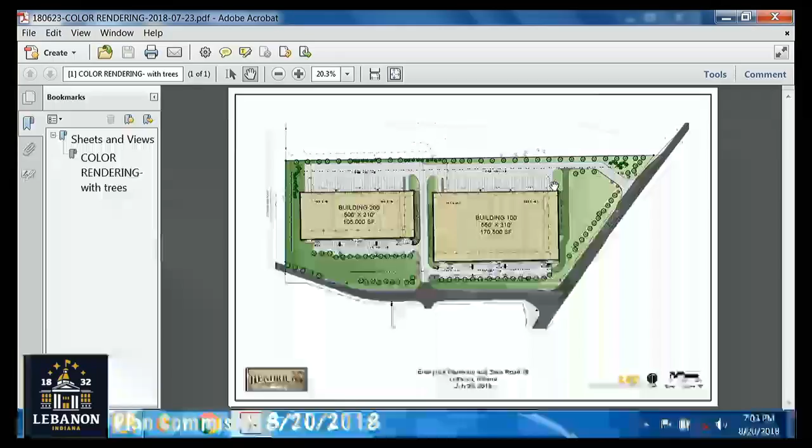Let me zoom in a little bit here so you can actually see it. They have two driveways, one that accesses off of State Road 39 and the other off Enterprise. One would be 40 feet and the other 34, just to allow them additional flexibility for truck access. The second one was corridor buffer.

They're modifying the corridor buffer along State Road 39 slightly. They do have plantings as shown, but there is some flexibility there for the corridor buffer. Again, non-residential street buffer on Enterprise Drive. Just some flexibility where this parking on building 100 here—they do have significant plantings, but just some flexibility on the buffer width.

Parking curbing impacts this center drive between the two buildings. What they're showing on either side here is the ability to add parking if necessary, depending on the type of user that ends up occupying one of these buildings. So they have requested flexibility to not have to put in curbing in this area, which could be expanded as parking as the site develops, until they know whether they need the parking or not.

And the final request, which still has some outstanding items we're working on with them, is a variance to request relief from the sidewalk requirement. They were approved to eliminate the sidewalk on Enterprise Drive. There's some physical limitations there, as well as the fact there's no sidewalks to connect to. The Board of Zoning Appeals did want them to investigate whether there was some ability to put a sidewalk on State Road 39 to increase connectivity back to the main part of the community on the other side of the interstate.

So we're going to work to connect with INDOT to see whether that's even feasible within their right-of-way. We're still working on that, so that's one outstanding item.

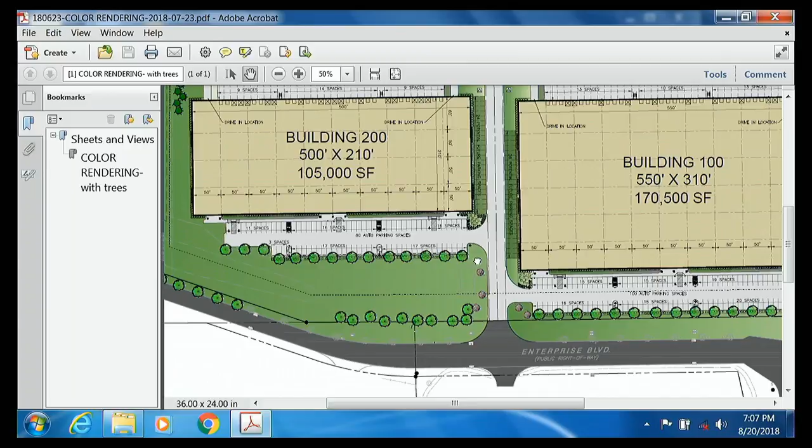This one doesn't show it, but they've added on another plan that they will provide additional landscape screening along this east end of the building to screen the truck access area from State Road 39 as well. That would be evergreen plantings.

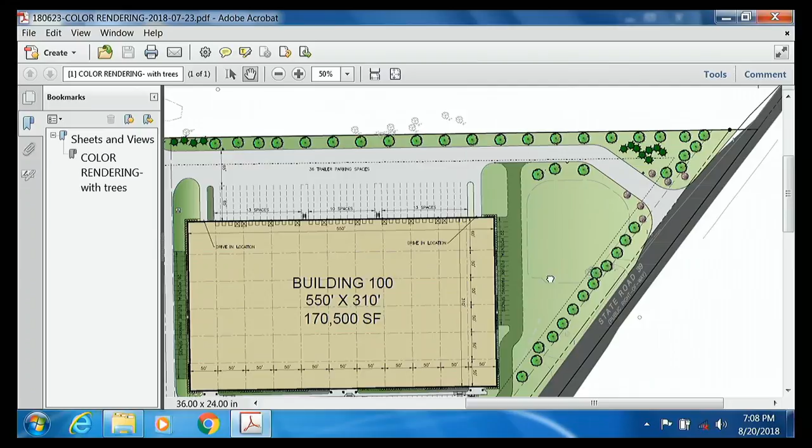This future drive will actually be installed at the current time for fire department access, and it will be paved at the current time, whereas here it's shown as future. But we did work with the fire department—they wanted to maintain 360-degree access around that building. So they will be installing that quote-unquote future drive now to make sure the fire department has access, and that will be paved.

In terms of signage, again this is speculative, so we don't know who the tenants are, but we identified what the requirements are in terms of wall signage and ground signage for this property. They'll be adhering to those requirements at such time that they apply for sign permits once tenants are identified.

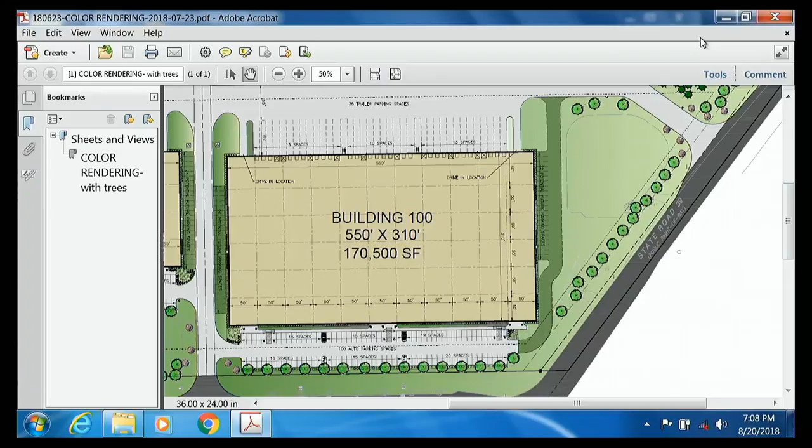Architectural review—I will pull up one of the building elevations for you so you can see what we're looking at here.

This top render represents what the front of the building will look like. It'll have 4 prominent entrances for the potential tenant spaces. This does allow for this to be a single tenant building or demised into potentially 4 tenant spaces. So they've got very prominent entrances, and all the materials meet our requirements from the UDO. It does represent an attractive design.

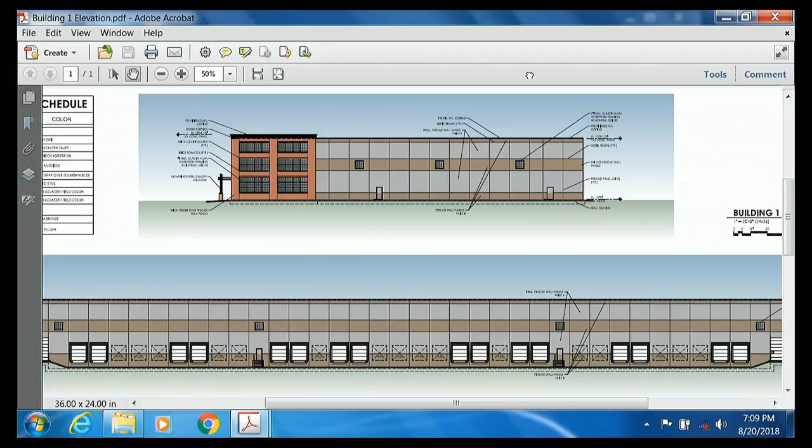I actually drove past one of these buildings in Wisconsin on the way on vacation, so I've seen firsthand what this building looks like on the ground. It is an attractive building. Those are kind of the highlights.

On the west side of the smaller building, they've provided access for fire trucks on the east side of the larger building. The fire department doesn't have any issue? My understanding is they did not have an issue with there not being 360-degree access. They would be able to access from the paved areas, both north and south, to any part of the building they needed to fight a fire.

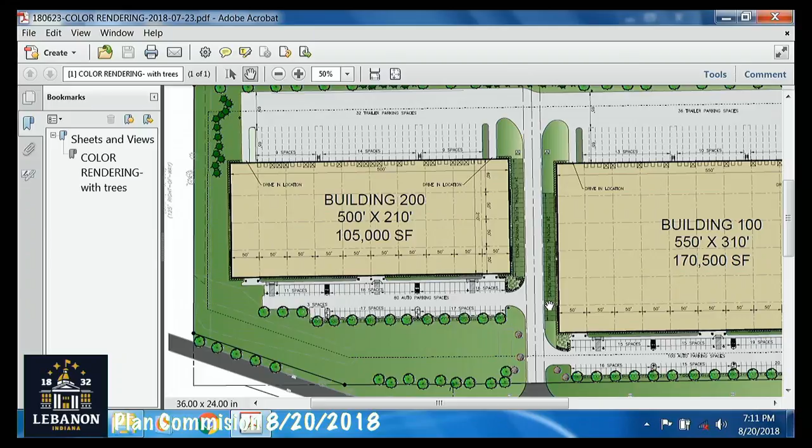And the driveway on that additional drive they're putting in on the east side, is that curbed or not? It would be curbed, yes. Let me clarify that a little bit—the one place it may not be curbed is where there may be potential future parking on either side of the drive aisle, where they'd have flexibility to install those parking spaces. Otherwise, it would be curbed.

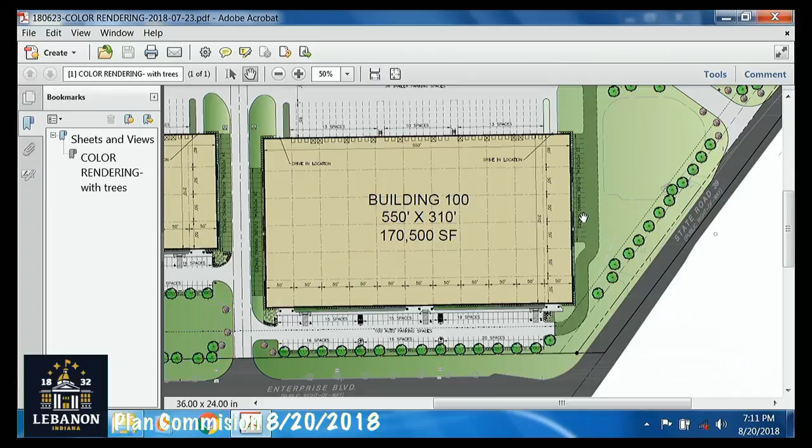Other questions for Ben? What about the rooftop units? With this being a speculative building, they don't have a location identified for units yet because it's going to depend on the user. We've made it very clear that those need to be screened per our ordinance, whether they're rooftop or ground mounted. But right now, they don't have a location.

Other questions for Ben? Would the applicant like to come forward?

I'm Aaron Hurt with Civil and Environmental Consultants, 530 East Ohio Street in Indianapolis. I was before some of you at the BZA hearing a few weeks ago. We have been working with staff, resubmitted our drawings and construction documents for the TAC comments, and I feel like we've made good progress, with just a few small remaining items to address. So we're working through those, and I think Ben did a good job summarizing things. Happy to answer any questions.

Questions for the applicant? All right, thank you.

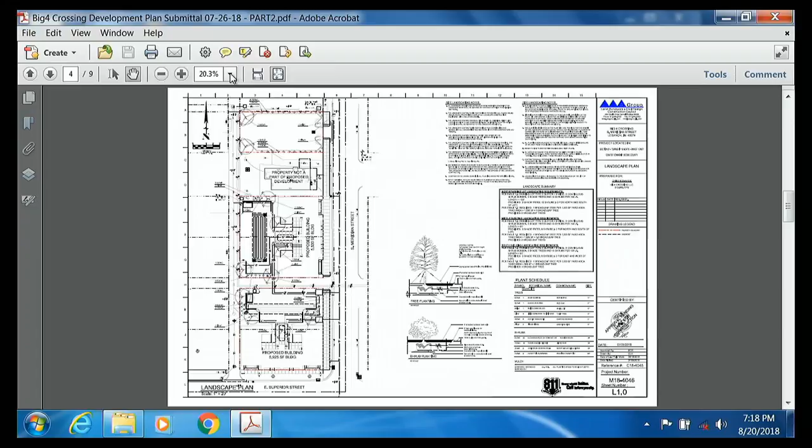So there are multiple components of this. The primary plat, again, those on the BZA have seen this already. The 2 buildings will be on the 4 southern lots. You've got 1 building that's right at the corner of Superior and Meridian. It faces Superior, which you see represented here.

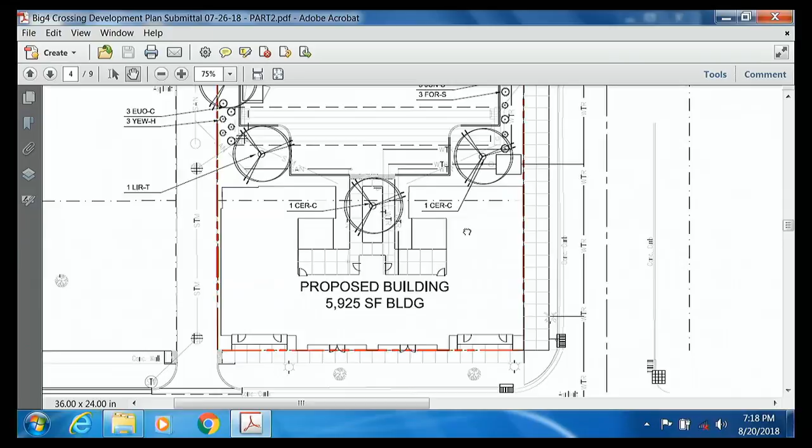So it has a retail storefront on Superior. Entrance to the residential units is from the rear of the building. You don't see them marked here, but there is parking provided behind the building, as well as the dumpster location. As you're moving north, there is the second building facing Meridian Street, very similar in footprint to the first, with retail spaces facing Meridian Street, access to the residential units from the rear towards the alley, and then parking and dumpster provided there.

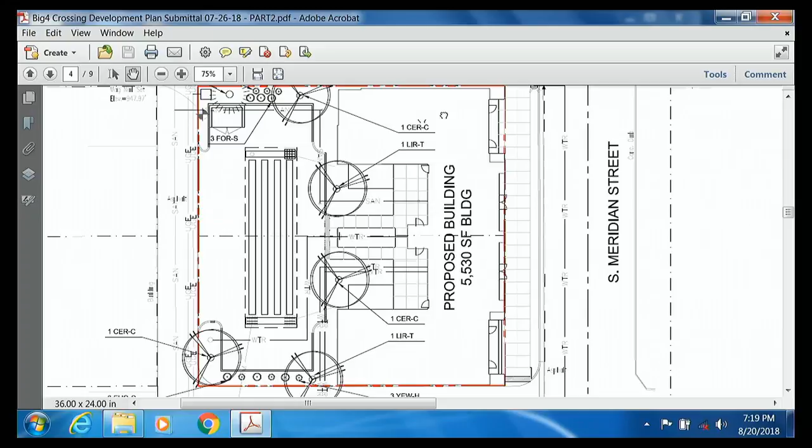In order to meet the parking requirements, which were very important here, they did also propose a parking lot on the far north. This is adjacent to the south property line with CVS, so they're taking up that remaining parcel that's part of this project to provide the required parking. I'll explain how the parking was calculated in a second, but just wanted to give you an overall sense of how this project lays out.

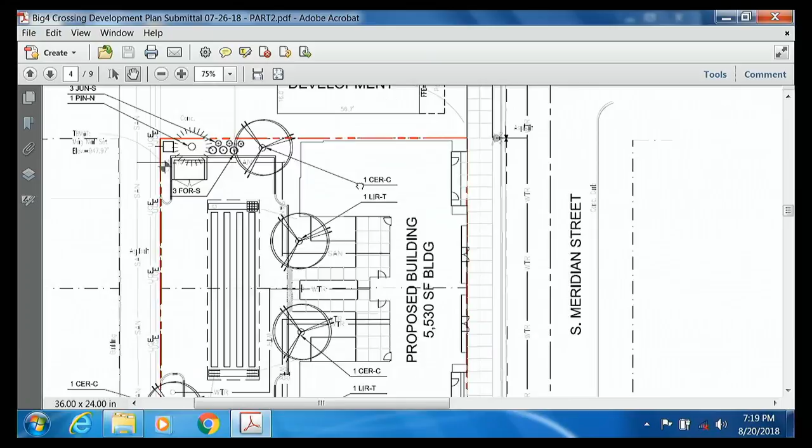As part of the project, we will be burying the electric lines that are overhead right now that run through this east-west alley and then turn north through here. In addition, the sanitary line that essentially ends at the southern end of this alley — we're going to have to replace the manhole structure. It's a very old structure that half the folks in the city didn't even know existed anymore. And then also likely replacing the line moving north as well.

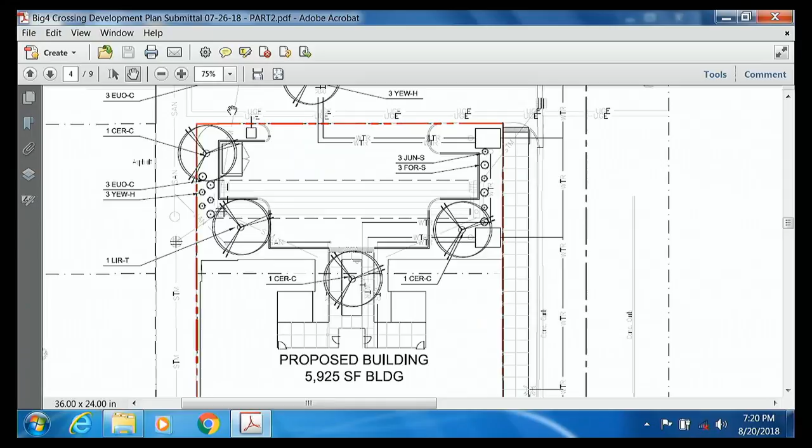That'll be replaced, so they'll create some additional capacity both for this project and one that's being proposed to the west. The alleys will be repaved and widened to create more safe and efficient access both for folks driving and accessing these parking lots, but also for fire access if they ever need to get to the rears of these buildings. In addition, this is the location of the Big Four Trail that will come down South Meridian Street, so the 10-foot wide path will be installed as part of this project along the frontage here as well. So it's creating a very different streetscape than what you see out there now.

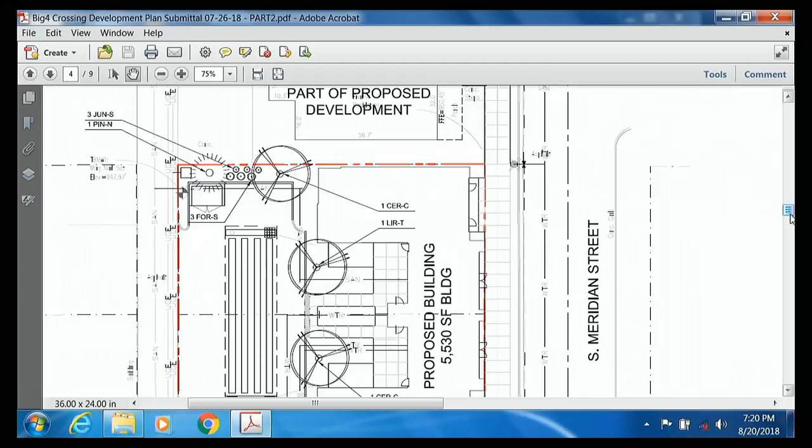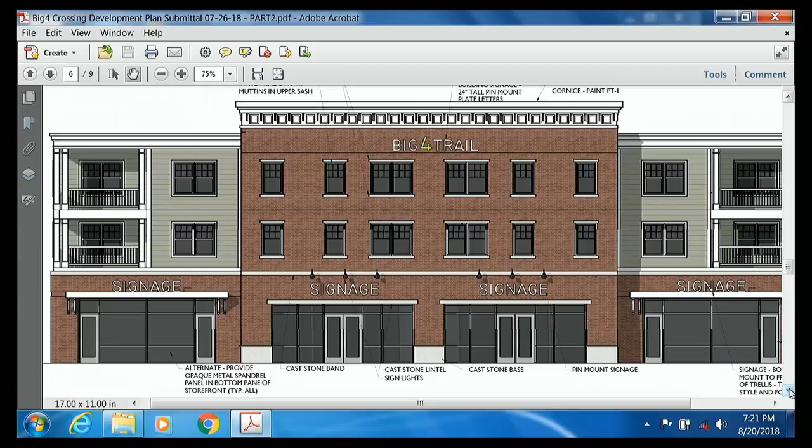Primary materials are brick, cast stone, and cement board siding, which all meet our requirements for the central business district and the downtown overlay.

Scrolling down, you'll see from the side and rear of the buildings what those will look like. There's the other side, there's the rear, so you see the first floor is brick all the way around. This is a utility chase, and that'll be all bricked in. So on the 2nd and 3rd floors is the only place you'll see the cement board siding. Otherwise, it's all brick construction.

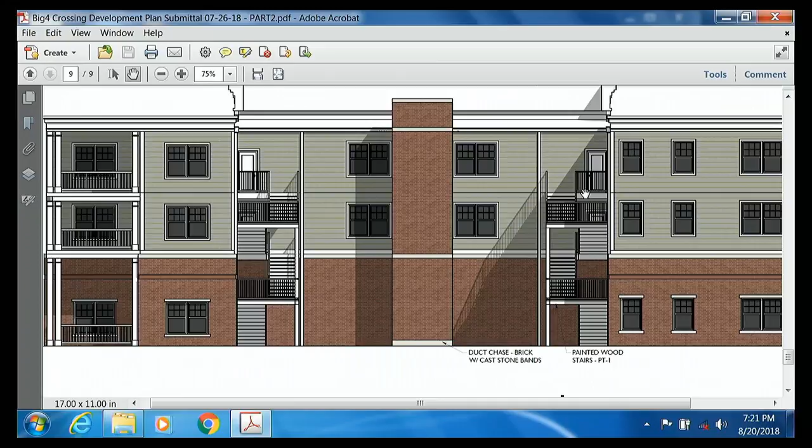So I will walk through some of the high points of the staff report. This did go to the BZA a couple weeks ago. There are a handful of items that they just weren't able to meet the requirements for. One is the requirement for residential street trees. It's required along any residential street. You have a street tree planted every 45 feet.

In this case, the right-of-way doesn't accommodate a planting strip large enough to plant trees when we go to the 10-foot wide path. So if we're doing more of a standard 5 to 6 foot sidewalk, you'd have more of a 5 to 6 foot planting strip that is better to accommodate a tree. With it going to 10-foot wide, we're really only leaving about 2 to 3 feet between the sidewalk and the curb, so it's not large enough to accommodate trees. So they did get a variance approved to permit relief from that requirement along the frontage.

The second is parking area setbacks. That north parking lot, in order to make sure we got the number of parking spaces required, and made sure we had a drive aisle sufficiently sized to provide safe travel through - they are angled parking spaces with essentially a one-way from west to east through the parking lot - but to make sure we had both the parking space size and the drive aisle requirement, they did need relief from the setback requirements on both the north and south property line, and that was approved.

Then same with parking lot perimeter landscaping. They do have some landscaping provided, but it's not within the 5-foot planting strip that we require. So they do have shown some shrub plantings. The trees obviously don't fit in 2 feet, so they have the shrub plantings, but not the tree plantings. So those are the 3 variances that were approved.

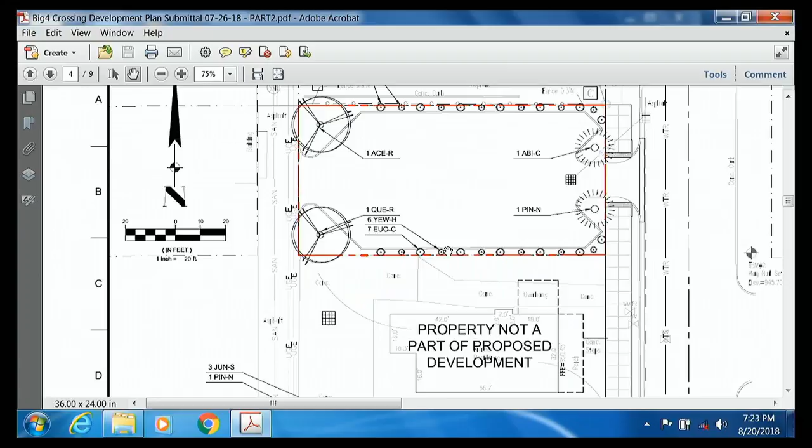They are working their way through the TAC comments. Again, I already mentioned some of the main utilities. The other thing they're working through is the drainage. They are going to have to provide some underground drainage for the site because they are increasing the impervious surface from what was existing. So while it's an infill project, because they're increasing impervious surface, they are going to have to provide some detention underground in order to accommodate that additional impervious surface.

They are working their way through some of those items. They have worked their way through many of them already and have addressed those comments back to city staff.

In terms of the development standards, you can see here they do meet all of the required central business district standards. And in terms of parking, one of the big things we discussed from the start is that we absolutely had to meet the parking requirements of the central business district, because there already is some relief allowed since you're in a more urban environment. We do permit a reduction in the number of parking spaces from a typical suburban site development because there are other options for parking in a downtown area.

So in this case, the retail/office space is speculative, so staff determined they should provide 1 space for 250 square feet, which is probably the most restrictive requirement. If it became an office, they wouldn't need that, but we use it in case it became a coffee shop, which would have a higher parking requirement.

And in terms of residential, you can see the requirements there: 1.5 spaces for every 1 bedroom, and everything larger than that requires 2 spaces, plus 1 additional space for every 7 units.

In calculating that, for mixed-use developments like this, there's a shared parking calculation ratio I can use. Basically, at certain times of day there's a higher demand for parking on the retail/office portion than there would be for residential. So at noon on a Wednesday, people may need those spaces for an office, but some residents won't be there. So you take a percentage of the total required parking and come up with a shared parking calculation.

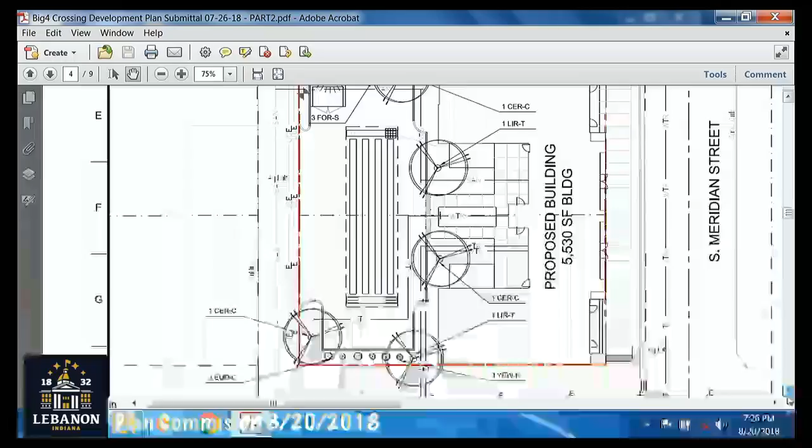Landscaping, they've provided landscaping that's required on the perimeter of the parking lots. You can see here they've got trees and shrubs on the north parking lot, and trees and shrubs around the perimeter of the two parking lots associated with the buildings shown here.

Signage plan, let me go back to the front elevation. They've identified a sign at the top of the building that would identify the actual project itself. This says Big Four Trail. I think it'll probably end up saying Big Four Crossing.

In the central business district, they're permitted up to 150 square feet for total wall signage on a building like this. So they may work with the square footage on that sign to get it a little smaller and make sure there's plenty of signage square footage for each of the tenants. But until those tenants are known, the only thing we know right now is maybe a Big Four Crossing sign. We'll definitely work with them to stay within the ordinance requirements for signage when those tenants come in.

In terms of architectural review, I mentioned they already got the certificate of appropriateness through their Historic Preservation Commission, but the elevations they've proposed also meet any requirements of the UDO and the Downtown Overlay District. So from that perspective, this is very similar to the last one.

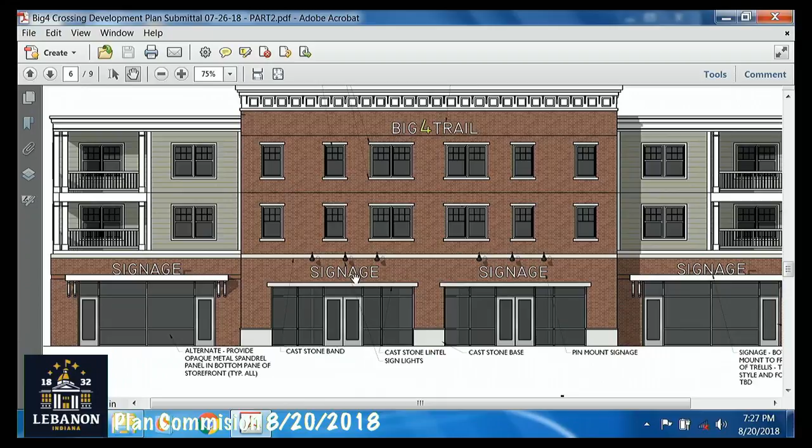There's a primary plat that needs to be approved because they are combining a couple of lots to accommodate the buildings, and then the second will be the development plan. Staff has determined they are compliant with the UDO in terms of both the primary plat and development plan, subject to the following conditions for the development plan: the standard ones, that they finalize and adequately address all remaining TAC comments, and then stormwater approval from the Board of Works.

So with that, I would be happy to answer any questions.

Couple questions for you, Ben. You mentioned in the front view there, along Meridian Street, there's a 10-foot path. Typically there'd be a 5 or 6 foot sidewalk, which leaves room to grow. So does 10 feet take up the whole space, or is it a 10-foot path plus an additional 2 or 3 feet that we're just concreting over? There will be 2 to 3 feet that would be turf between the curb and where the path starts, and then the path would be the 10 feet from there all the way up to the building face. So there's this 2 or 3 foot strip where we're going to try to get grass to grow.

And then the underground stormwater detention, who's responsible for that? That would be a private detention facility, so they'd be responsible for maintaining that.